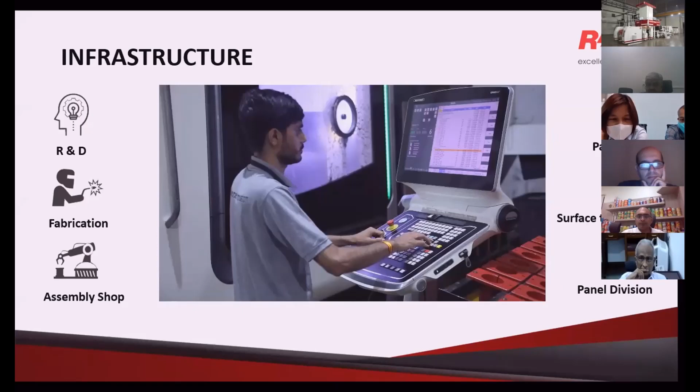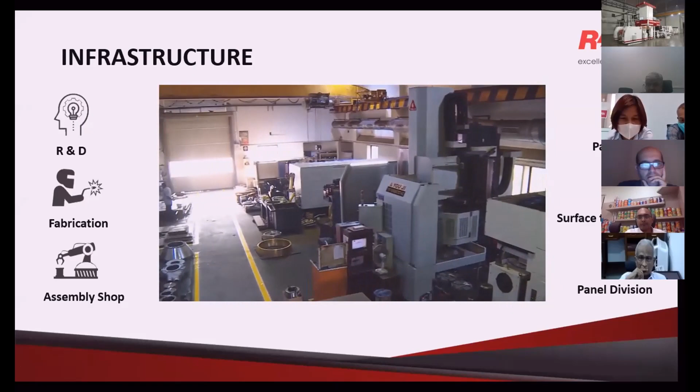As we can see, all the die parts are made on 5 and 7 axis CNC machine centers from DMG Germany with high precision and repeatability for both blown film as well as T-die for ECL and extrusion sheet line. Also, what we're seeing right now is a bird's eye view of part of our machine shop, where even all frames are made on CNC machines to maintain parallelism and precision.

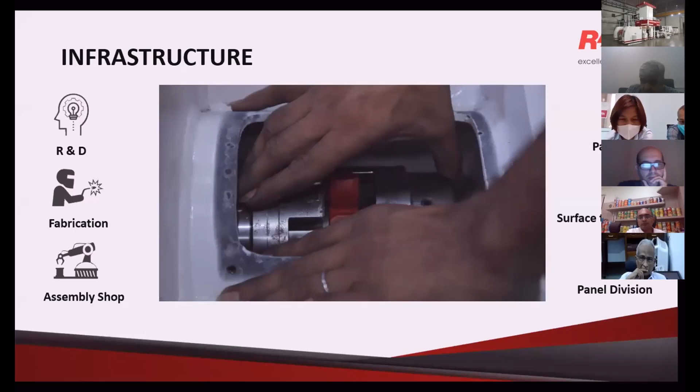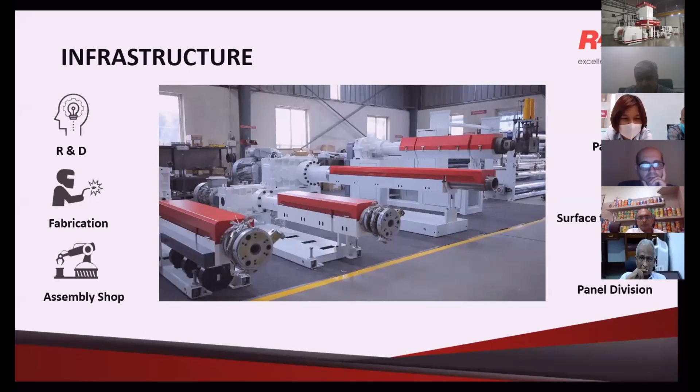At every stage of manufacturing, stringent quality standards are maintained and checked to assure the best performance when all the components and assemblies are put together as a production line.

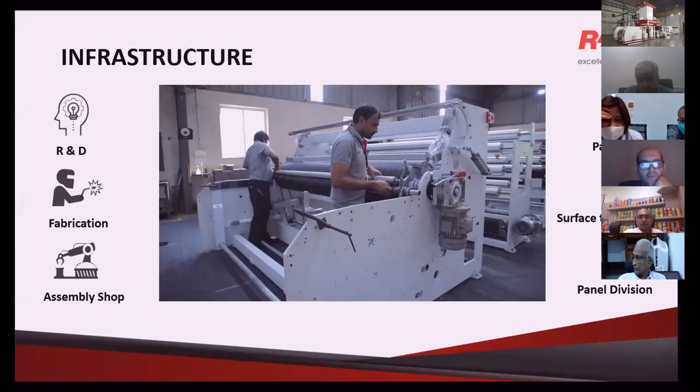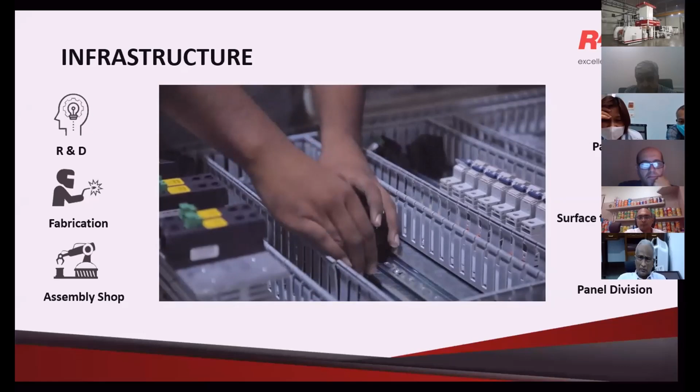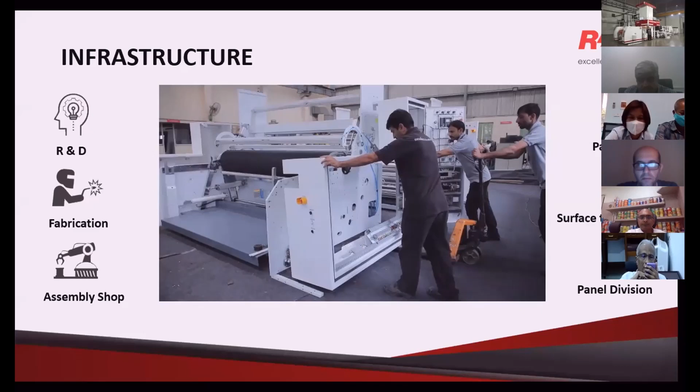As we all know, Industry 4.0 is the need of the hour. So all electronic communication and control panels with CE compliance are built in-house, and with the help of our team of programmers, we make our own operating programs for our machines, and we can integrate different technologies which work seamlessly as one system, enabling us to provide remote customer support, which you will witness later on in this further virtual open house.

With this one, we come to the next point, which is sustainability, a subject which cannot be ignored anymore. Our entire operation runs on solar energy, and all our processes are on SAP, which works with Salesforce, enabling us to get a lean manufacturing setup.

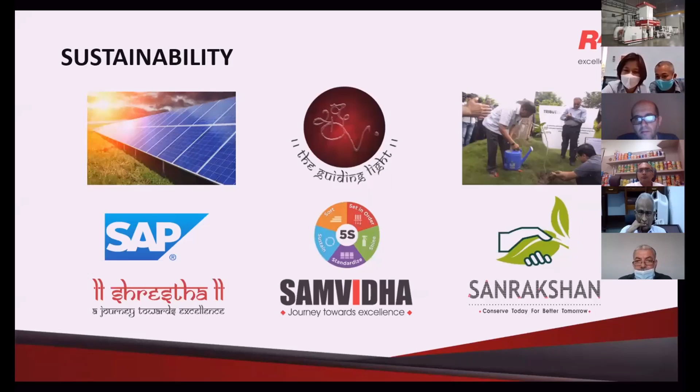This is a very unique offering of Rajoo, called the Rajoo Innovation Centre. With Rajoo Innovation Centre, we have a unique offering where we are equipped with 5 and 7 layer blown film lines, 3 meters wide, to test various formulations and newly designed assemblies, backed up by a full range of laboratory equipment.

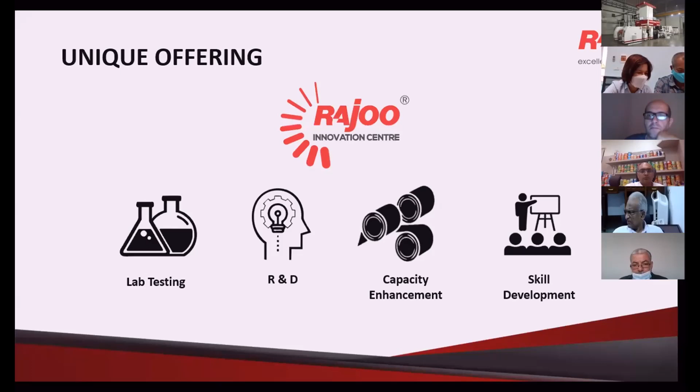With this facility, we are able to take care of our customers at times of machine breakdown, capacity enhancement, and new product development. This center also imparts various training and contributes to skill enhancement for operators and other industry colleagues. RIC also facilitates raw material suppliers like ExxonMobil and Borouge to test their raw material.

With this framework, Rajoo offers blown film lines for barrier and non-barrier film for flexible packaging, agriculture film, and specialty film. We also offer sheet extrusion lines and thermoforming machines for semi-rigid packaging, and cross-lamination film lines with complete post-extrusion systems for tarpaulin applications, and last but not least, extrusion coating and lamination lines for flexible packaging and woven sack industry.

During our journey of 3 decades, we have installed more than 5,000 machines across the globe in more than 70 countries, and also have strategic partnerships and alliances like Wonderpack Industry, which is a pioneer company of thermoforming machines in India, now part of Rajoo Group.

Bausano from Italy, with joint venture company Rajoo Bausano Extrusion Private Limited for PVC extrusion lines. Technical tie-up with MEAF from Holland for sheet extrusion lines. And last but not least, Kohli Industries for extrusion coating and lamination lines.

Like Rajoo, the journey of Kohli Industry began 5 decades ago with the vision of Mr. Kohli to lead the flexible packaging industry with engineering excellence and personalized customer care. Today, Kohli Industry is a leading supplier and preferred choice for printing and converting lines in the flexible packaging industry.

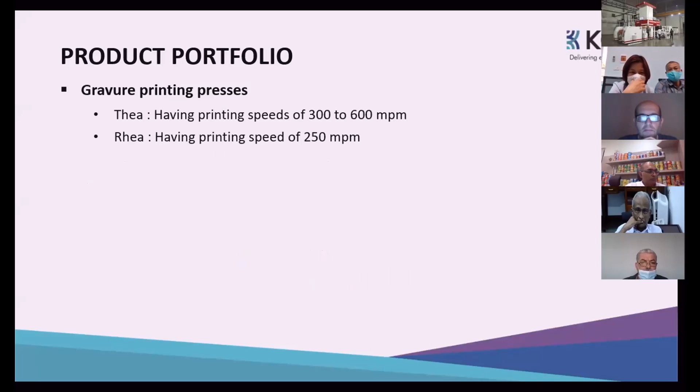With a product range of gravure printing presses of the Thea series with printing speeds of 300 to 600 meters a minute, and a full range of laminating machines with solvent-less, solvent-based, combi and special application lamination lines, and last but not least, slitter rewinders for the flexible packaging and label converting industry.

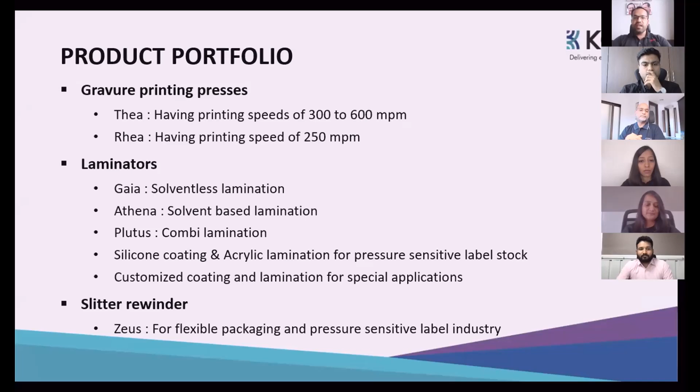The reach of Kohli is also across the globe, with more than 1,600 machines installed in 33 countries. So what we can say is that we have marked our presence in the flexible packaging industry across the globe.

Here, we would also like to introduce Printgraph, our marketing partner for the Lamex series product in India.

So here comes the question: what value proposition are we bringing to the flexible packaging industry for extrusion coating and lamination lines? To answer that, I would like to touch upon a few points.

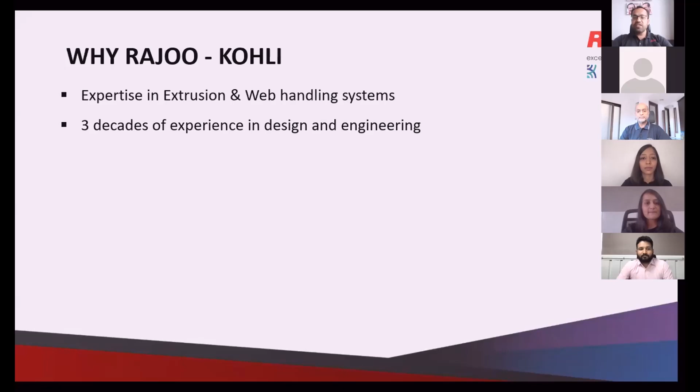First is expertise in both extrusion as well as web handling systems, so we are able to offer the best in class from both sides. We have 3 decades of rich experience in designing and engineering for polymer processing, printing, and converting. We have high precision critical components made in-house like screw, barrel, die head, feed block, as we've seen earlier in our infrastructure. We always focus on making machines with energy efficiency.

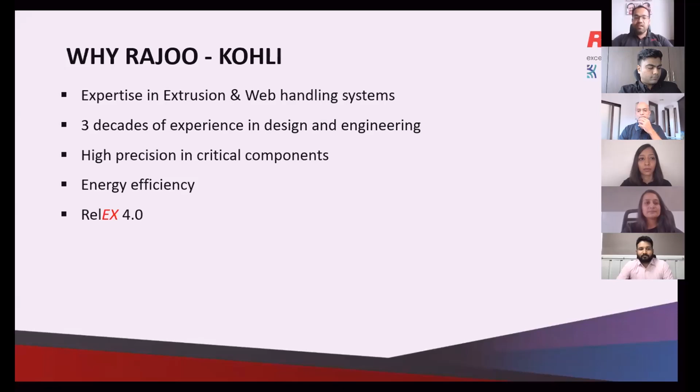As Khushbu mentioned earlier, RelEX 4.0 is a need of the hour when it comes to Industry 4.0. Most importantly, we offer appropriate technology by manufacturing parts, components, and assemblies in-house, as well as integrating the best available in the industry.

Next, we reach the question: why extrusion coating and lamination with reference to other lamination processes? The reasons are many, but we would like to touch upon a few important ones.

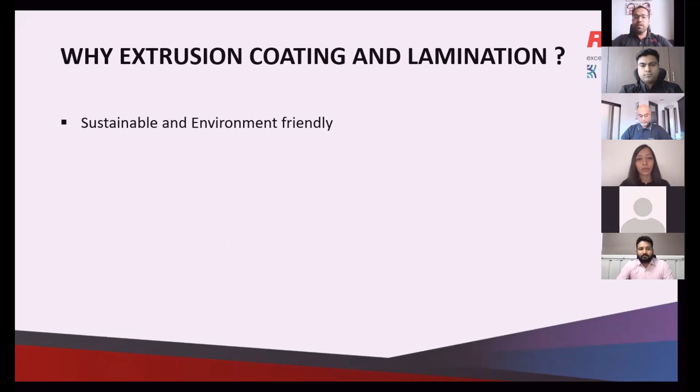First, it's a sustainable and environmentally friendly process, as no chemical is involved in laminating, with virtually zero curing time post lamination, so we can immediately use it for further converting. As polymer melt is used as an adhesive layer, we get better barrier properties, and also cost savings on foil wastage. We also get better flex crack resistance when laminating metallized film. These are the few reasons why extrusion coating and lamination is getting popular compared to many other laminating processes available in the industry.

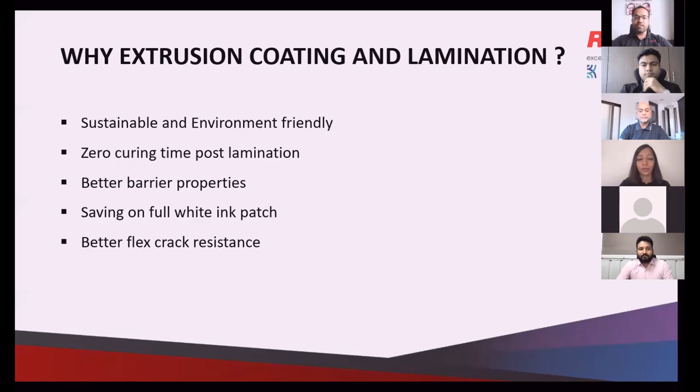Moving forward, though many of you are well aware of the basic concept of extrusion coating and lamination process, let us take a quick look at the concept through this small animated clip.

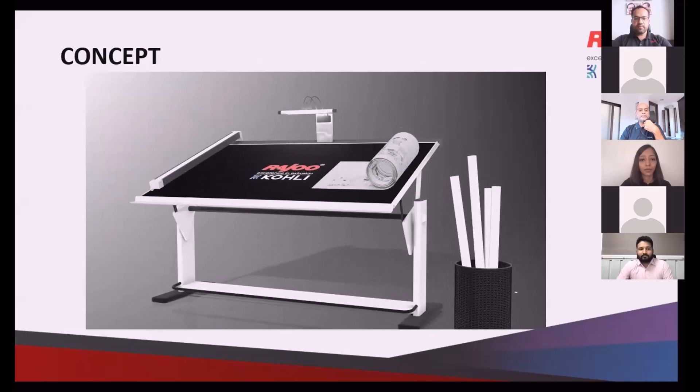Dinesh, there's no sound. No sound. Let me just do it once again.

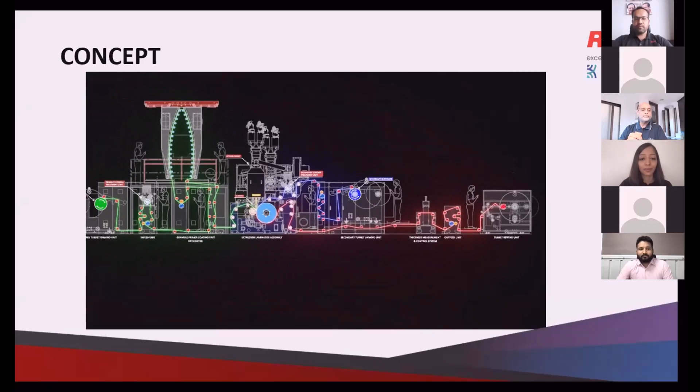I'm sure now all of you are eager to go to the shop floor to see the machine running in commercial production. So I won't take much time, but quickly brief you about the specification of the line and the application we are going to see today. The line is LamEX 360, a coaxial line with a 90 and 75 mm extruder.

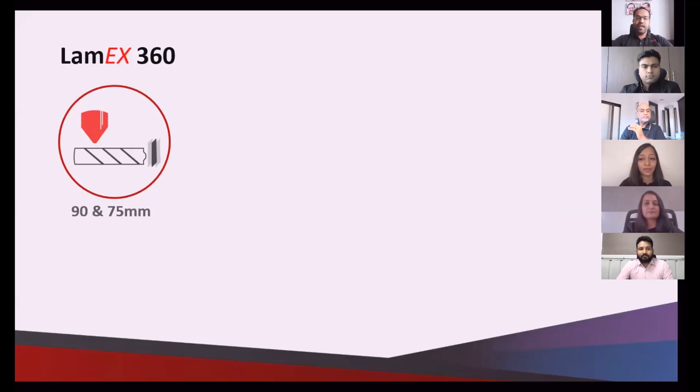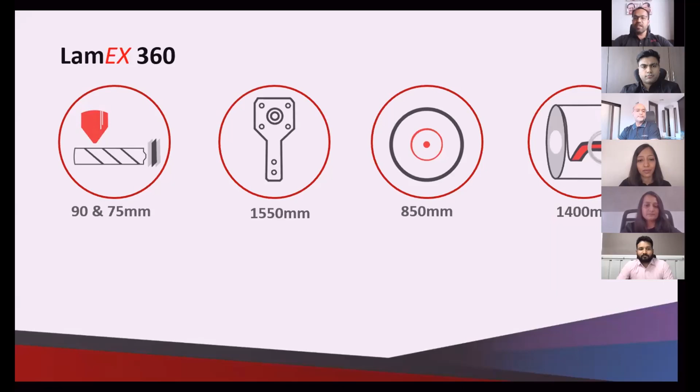It has a die lip width of 1550 mm and a chill roll with 850 mm dia. The maximum web width we can run on this line is 1400 mm, and the machine is mechanically designed for 400 meters per minute, with a production speed of 350 meters per minute, suitable for extrusion coating range from 8 GSM to 60 GSM.

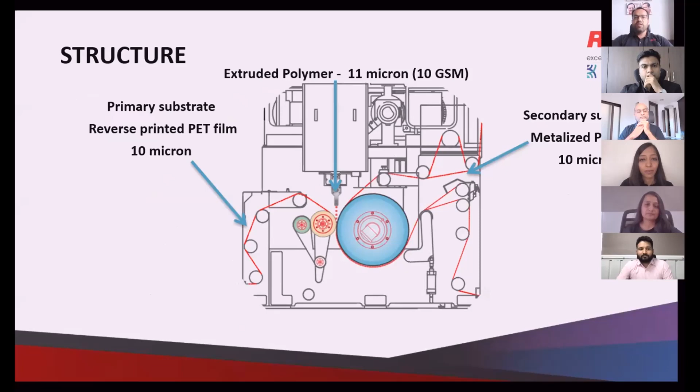The structure we are going to see on this line today is a primary substrate, a reverse printed PET film of 10 micron, laminated with a secondary substrate, which is a metallized PET film of 10 micron, through melt lamination of extruded PE of 11 micron, which is about 10 GSM. The width of the job is 1180 mm and the end application is snacks packaging.

With this, I come to an end of my presentation. Thank you. Over to you, Karishma.

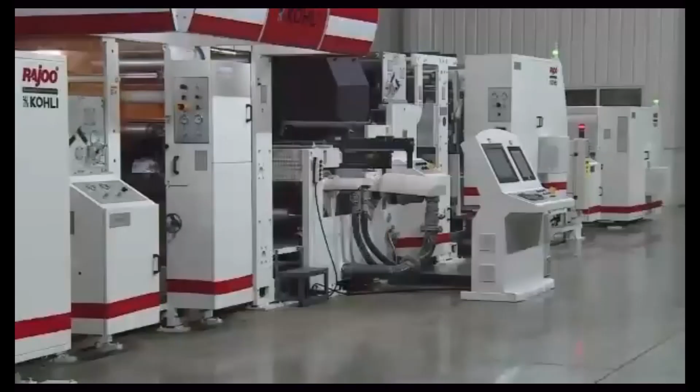Kakuji, sorry to interrupt. Just a minute. So before we ramp up, let's pray to the Almighty. Dharmesh, are you there? Please take the coconut. Yes ma'am, we at Rajoo always believe in spiritual professionalism and pray that wherever our machine goes, it should bring prosperity to the land and the owner of the machine. So I request Dharmesh to do the kick off before ramping up. Dharmesh, where are you? Yeah, there he is. This is our very auspicious ceremony. Thank you, Surya.

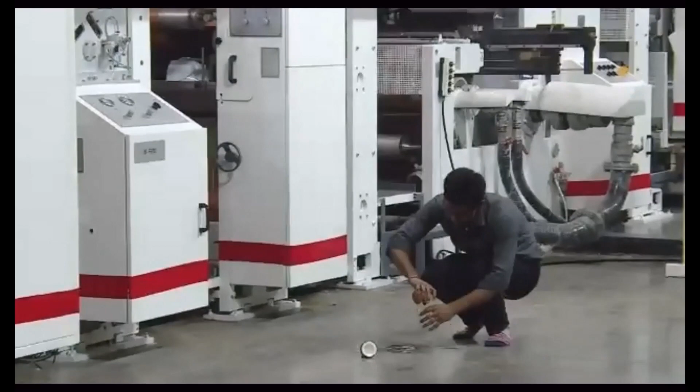Thakurji, over to you. Thanks, Khushbu. Okay, Sonal, okay, there we are.

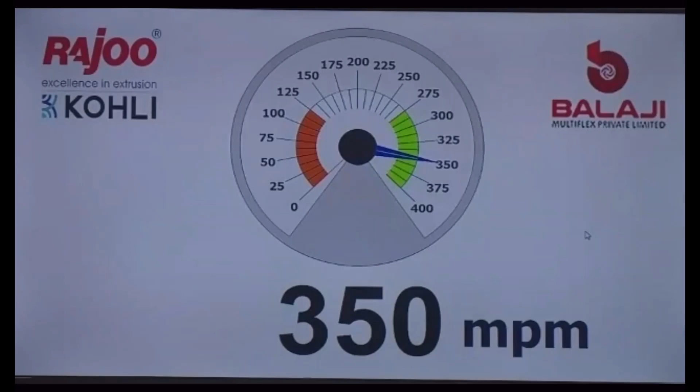The speed is ramping up, and right now we are running the machine at 325 meters per minute, which of course will be ramping up in due course. You can see there, it is going up. It's running at 340 meters per minute now. It has reached, there it is, 350 meters per minute. Wow, as you can see, we have reached a production speed of 351 meters per minute to be exact.

Thank you, everyone. Thanks for that applause. So as you can see, we have reached a production speed of 351 meters per minute. And I am sure this has already increased your expectation for our today's demonstration.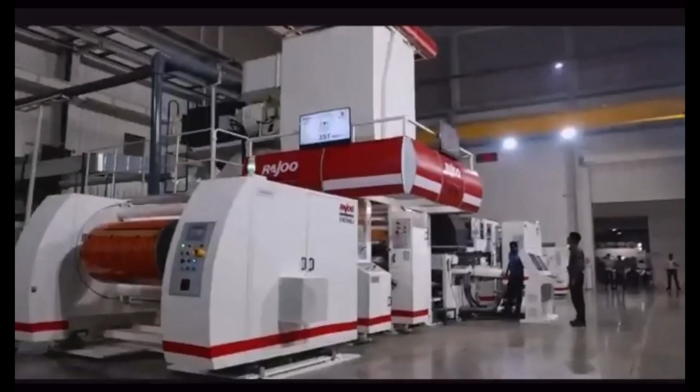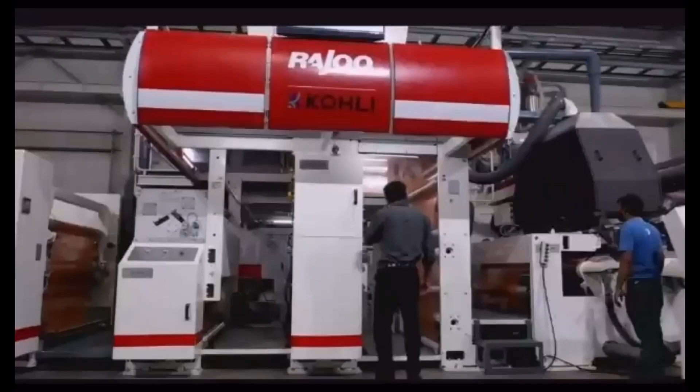We are looking at the machine from the primary unwind side, moving across the entire machine all the way to the rewinder, passing through different processes. What we are crossing is the primary turret unwind, the corona treating and infeed unit, the Gravure anchor coating unit, the control panel behind which we have the extrusion and lamination unit, the corona treating for the secondary web, the secondary turret unwind unit, the coating thickness measuring system, outfeed unit, and finally we reach the rewinder.

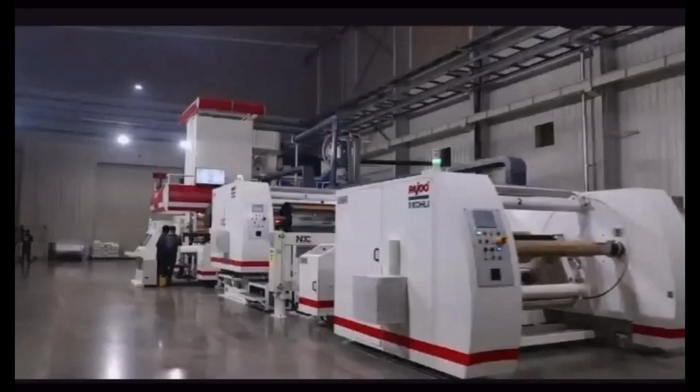Now let us have a closer look at each unit.

Starting from the primary turret unwind unit, the unwinder is designed for reel diameters of 1000 millimeters and reel weights of 1000 kgs. The web tension is precisely controlled by servo motors and dancer rollers. This unit is designed for automatic splicing at maximum production speed, which in this machine is 351 meters per minute. You can do the top side and bottom side splice, depending on the coating side of the substrate. All controls for the unwind tension and the splicing are mounted on the unit itself for easy and safe operation.

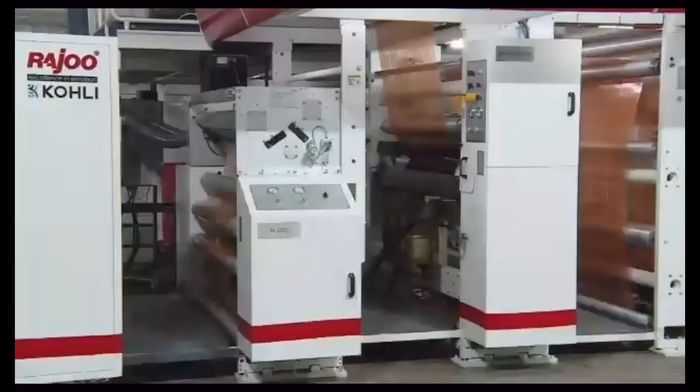Moving ahead to the corona treating unit and the infeed nip assembly. The corona treater in this machine is driven and synchronized with the machine speed. The infeed tension is precisely controlled by a servo motor.

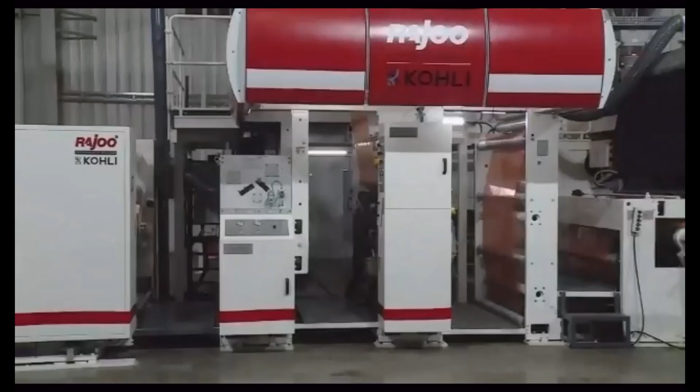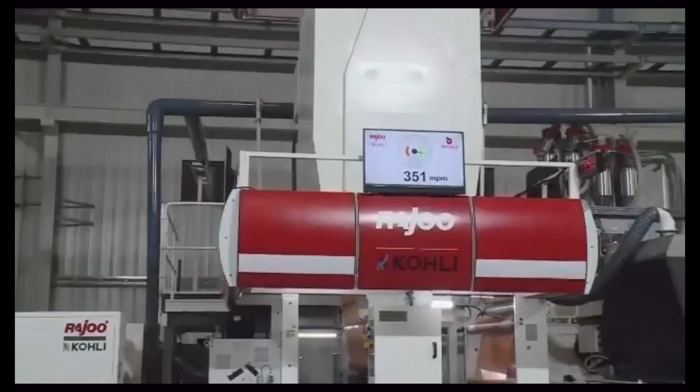Now let us move ahead to the Gravure primer coating station, which is actually very similar to a Gravure coating or Gravure printing station. It consists of the following assemblies: coating roll assembly, rubber pressure roll assembly, doctor blade assembly, lacquer tray assembly, lacquer circulation system, and drying. The drying system consists of two-side drying, also known as double-side drying hood, having a total drying length of 6 meters, or 3 meters on each side.

Both drying hoods slide open pneumatically above the catwalk, which allows the machine operators to walk right inside the drying area for easy cleaning and maintenance of idler rollers and air nozzles. As you can see, the machine is already in production and running at 351 meters per minute.

Unfortunately, we will not be able to show you this feature live, but we did record this operation earlier, and I will request Pratik to please share his screen and we will show you this recording.

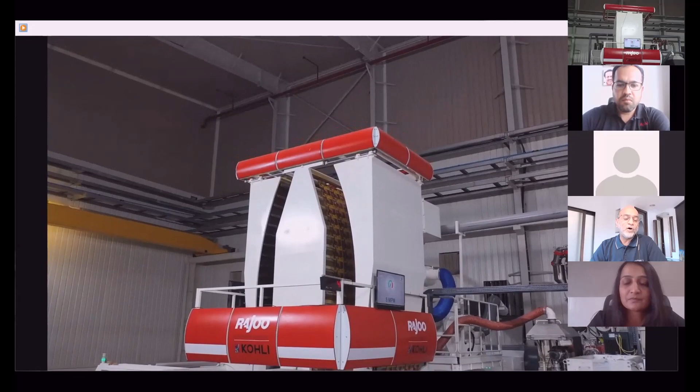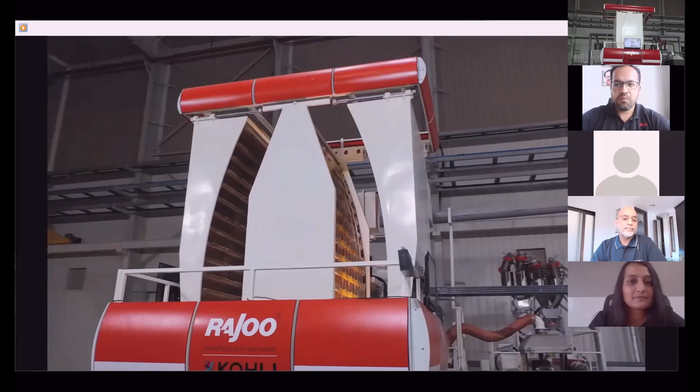As you can see, that's the double-side drying hood. It is opening pneumatically above the catwalk, allowing machine operators to go right inside the drying hood area for easy cleaning of rollers and maintenance of air nozzles. That's our two-side drying, having a total length of 6 meters. And now you will see it closing, again sliding pneumatically above the catwalk.

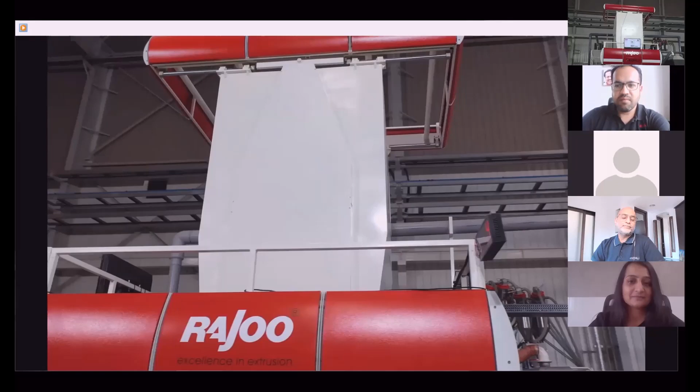Thank you, Pratik. The drying hoods are designed to ensure maximum efficiency with minimum energy consumption. We offer different heating options: electrical, thermic oil, and gas.

Now let us go over to the secondary turret unwind unit. This unwinder also is designed for reel diameters of 1000 millimeters and reel weights of 1000 kilograms. The web tension again is very precisely controlled by servo motors and dancer rollers. Again, automatic splicing is done at maximum machine production speed, 351 meters, as we have all seen. Just like the primary unwinder, here also you can do top or bottom splice, depending on the laminating side of the structure. All controls for the unwind tension and splice are mounted on the unit itself for easy and safe operation.

Following the production process flow, at this time, ladies and gentlemen, I would like to bring in Sunil from Rajoo, who will take you through the extrusion and lamination process of the machine. Sunil, over to you. Thank you very much, Kapu.

Witnessing the extrusion coating and laminating line in an open house, and that too at a customer's production facility, would surely have raised a lot of expectations from us. We will try our best to delight our viewers today. I must commend the Rajoo Kolsite team, and also thanks once again to ever so energetic and passionate Pranav Bhai of Palaji for his support. While Kolsite's forte is converting and web handling, extrusion is in the very DNA of Rajoo engineers. Not many may know, within the Rajoo group, we also process about 1,000 tons of polymers every month. So Rajoo are machine manufacturers and polymer processors as well, a very strong combination.

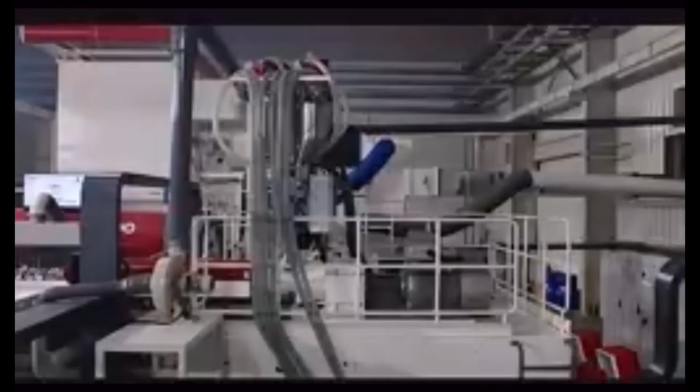This machine is a co-ex system with two extruders mounted on a platform with 3-axis movement, X, Y, and Z. Two axis is not sufficient at times since flexibility is needed by the operators.

Each extruder is equipped with a multi-component material conveying system. You can see the pipes conveying the granules from the floor to the top of the extruder through vacuum.

Prices of polymers have gone through the roof, and so have the prices of copolymers, master batches, and additives. Accurate dosing of each polymer component is essential. Dosing and blending thus plays an important role.

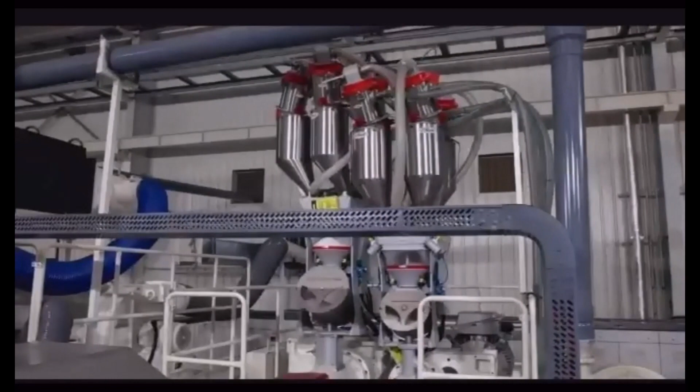You are now able to see, very soon you will be seeing the rotary motion in the batch blenders mounted on each extruder. Right below the extruder you can see a tumbler. This also helps in maintaining consistency in the polymer recipes.

Brand owners today are demanding supply of laminates measured in meters and not in kgs as it used to be. This is necessary for them to control their own cost of packaging. This number of packs per roll of laminate is important. Then control of yield, or grams per square meter of the laminate, becomes even more important.

The machine is equipped with a GSM control system. This is achieved by controlling the screw speed, nip speed, and weight of the polymer being fed to the extruder, measured by the load cells just before the granules enter the extruder.

Energy efficiency is a hallmark of Rajoo's extrusion system. When extruders are operating, the heaters hardly come on. Heat is generated through friction to keep the polymer in molten state.

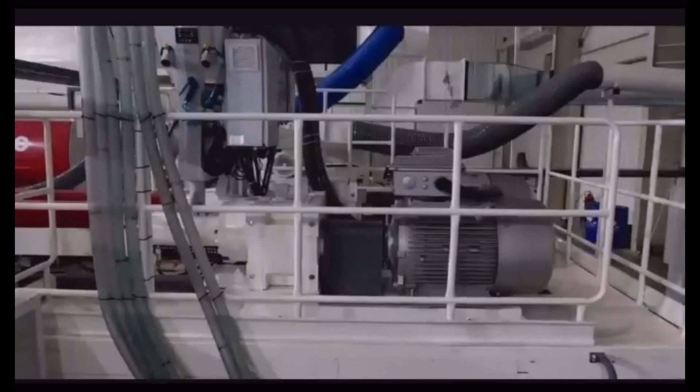As an example of energy efficiency, extruders are connected to the gearbox, which in turn is connected to the motor through flexible coupling. Gone are the days of the V-belt and pulley system, thus reducing transmission losses.

Operator safety is always kept in mind in the complete design of the machine, since there are many moving parts and hot zones. There are emergency switches in a number of places, and also rope switches. The moving parts are covered, and hot parts are prominently identified. All such aspects, and even the ergonomics, are always kept in mind, like you see the drying hoods opening up.

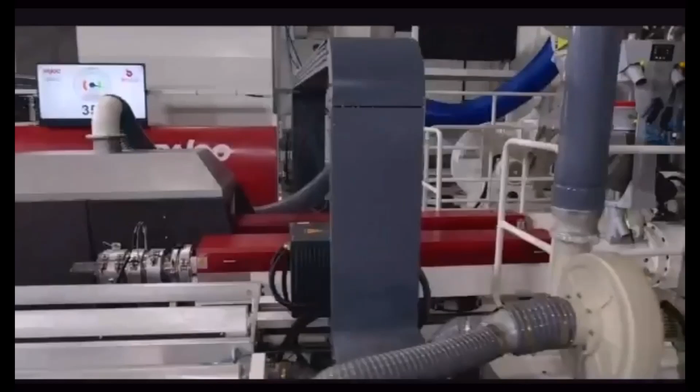Rajoo makes their own screw and barrel for all applications, sheet lines, blown film lines, and extrusion coating and laminating. You did have a view of our manufacturing facilities. However, we continue to develop screws and barrels based on the rheology of the polymers being developed each day, and this does become important when processing critical polymers.

This machine is with two extruders, the two red hoods you see on your screen. It helps in processing different polymers in each layer. The extruders are 90 mm and 75 mm in size.

A co-extrusion system helps in reducing the cost of recipe, expensive polymers which are used in just one of the layers. For this particular application, in addition to the double barrier section and the detachable mixing pin, we also provide a static mixer between the extruder and die to further homogenize the melt and improve its quality.

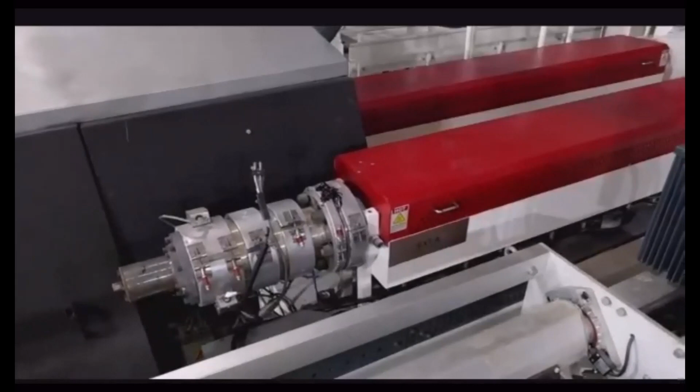The polymers do come with a lot of impurities, and it is absolutely essential to remove them to improve melt quality and its properties. The extruders are equipped with a candle filter, which you see right in front of the extruder, which has a very high melt filtration area. The melt pressure and temperature is continuously monitored, and there are alarms in case the back pressure crosses its limits due to clogging of the screen or any other malfunction.

Since there are two extruders, it is necessary to combine the two layers, which is achieved by the feed block. The melt path in the feed block is critical, and the surfaces coming in contact with the hot melt are properly machined with no dead spots, to ensure consistency and maintain the desired layer thickness ratio.

This is a 3-layer BBA layout. The BB streams are coming from the 90 mm extruder, and the A stream from the 75 mm extruder.

When we come to the control center, the GSM being deposited by each extruder will also be visible. And now the die, the heart of the machine.

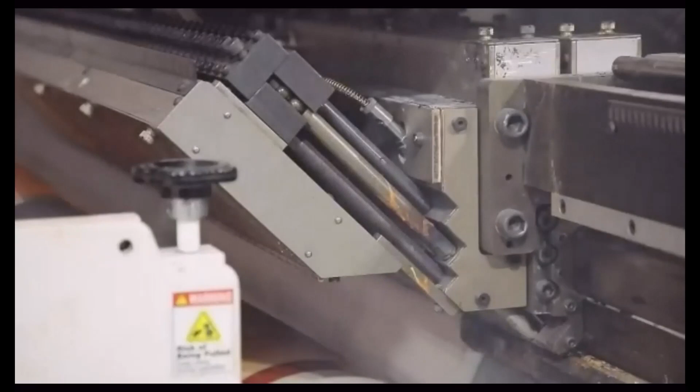Rajoo has been designing and manufacturing T-dies for over 26 years for our sheet extrusion systems. Thus, developing T-dies for ECL came to us naturally. I can say with pride that Rajoo is the only Asian ECL supplier to offer our own manual dies.

Die design is critical. The melt flow paths are without any dead spots, and the melt flow is streamlined for ensuring consistent deposit of the polymer. The surfaces coming in contact with the molten polymer are finely polished with minimum friction in the melt flow path. When it comes to automatic dies, we source from the best in the world.

The automatic die on the 360 is from Cloeren in the US, with minimum edge bead using EBR technology. Effective deckling is up to 50% of the slot width, which is 1550 mm.

The 1550 die gap is adjusted using 62 bolts with cartridge heaters, which expand or contract depending on the signals being received from the thickness measurement sensor, which we will see shortly. This is another example of Rajoo offering customized, appropriate technology and integrating bought-out systems in the machine.

The laminating station is another critical assembly in this process, where the primary substrate is laminated with the secondary substrate using molten polymer under nip pressure.

The chill roll, the big roll on the right-hand side around which the laminate is wrapped, cools the molten polymer very rapidly. Thus, this roll is highly heat conductive with very low thermal expansion. It is a double shell design with spiral flutes, with water circulating through it for minimum temperature variation across the width. This is an important factor to ensure a high and consistent bond strength.

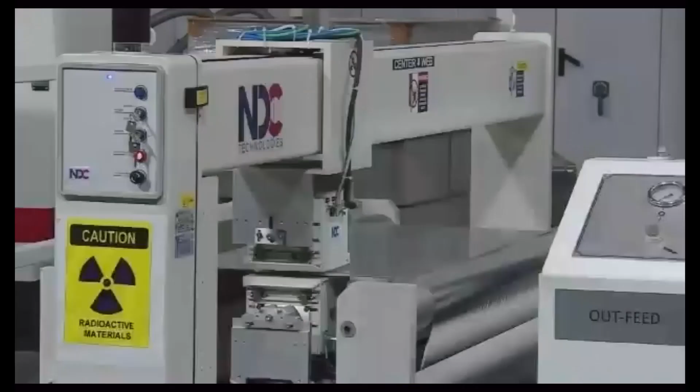The total thickness of the laminate is measured by the beta nuclear transmission sensor. The web passes through the scanner, oscillating across the complete width. The thickness is sensed, processed by the software, and gives continuous feedback to the die for adjustment of the die lip gap. This system is sourced from NDC in the US.

Yet another example of successful integration by Rajoo of a bought-out system with the main equipment. A question is often asked: why both GSM control and automatic die? While the GSM control improves the thickness variation in the machine direction lengthwise, the automatic die controls the cross direction, that is along the width, and the deposit of the molten polymer between the two substrates.

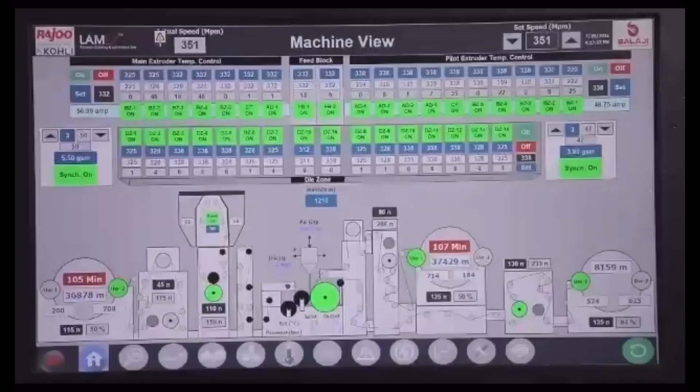This is the nerve center, or the control center, for the full machine. From a single touch screen, all the machine functions are monitored and controlled. It incorporates the RELEX 4.0 platform of Rajoo engineers. It is also being monitored and controlled remotely through a smartphone or a tablet.

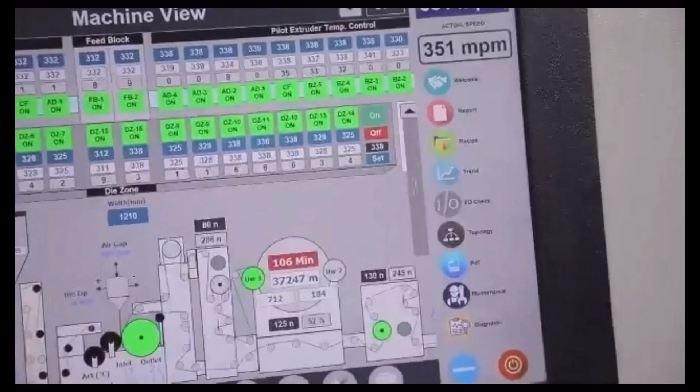This platform has multiple features. All kinds of reports can be generated: shift production reports, thickness variation, material consumption. Recipe of the polymers is entered and can also be recalled at a later stage. Even the data of different polymers can be stored. Trends like temperature profiles and electrical loads are available.

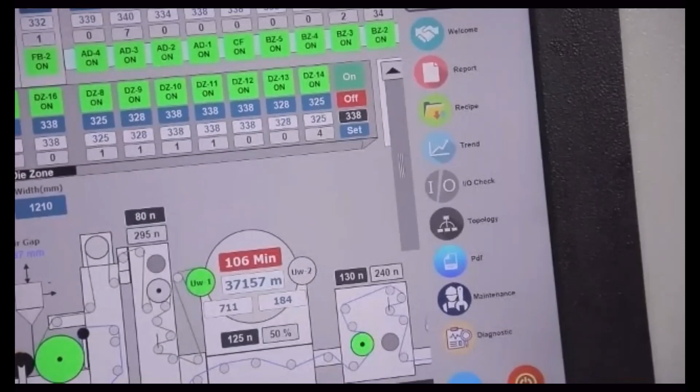The topology of how all components are interconnected to each other can also be seen. With the maintenance menu, diagnostics for the complete machine are available to help in fault detection. Gone are the days of looking for hard copies of the operating manuals, and when you want them, you never find them. The system comes preloaded with manuals of each and every function and assembly of the machine. Even ordering of spares is so easy, since all the information is available digitally.

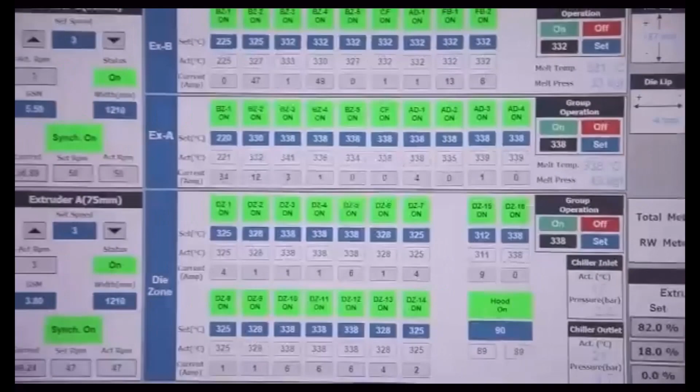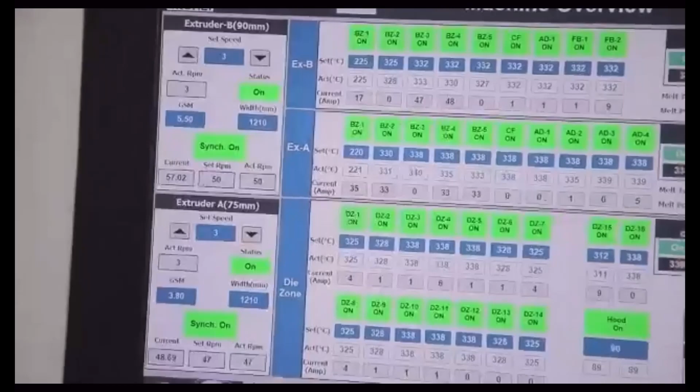The machine is currently running at, if I can see the screen, it was running at, oh, it's still running at 351 meters per minute. One can see the left panel where it shows the deposit by the extruders. The top one is a 90 mm extruder running at an RPM of 50. The bottom is a 75 mm extruder running at 47 RPM and depositing 3.8 GSM. So close to 9 GSM is being deposited.

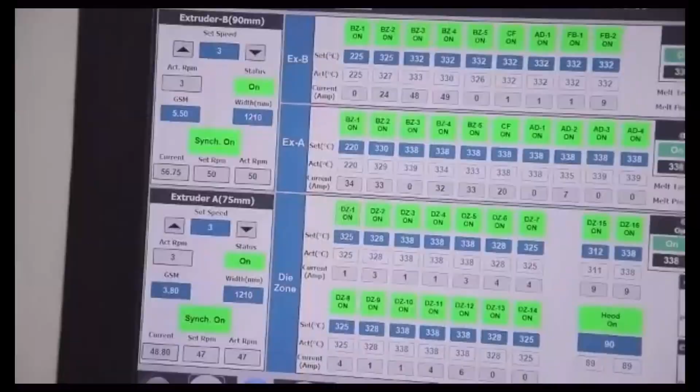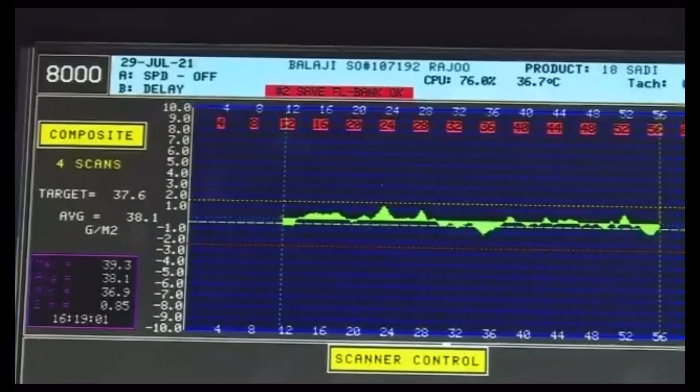Moving forward on web handling, can I request Kaku to come in, please?

Thank you, Sunil. Now let's go over to the turret rewind unit. The rewinder is again designed for reel diameters of 1000 millimeter and reel weights of 1000 kilograms. The web tension is precisely controlled by servo motors and dancer roll assemblies. Splicing is always at the maximum production speed, which in this machine is 351 meters per minute. At the rewind unit also, you can do top or bottom splice, depending on which side of the laminated web you want as the outside surface of your reel.

As the machine is ready to embrace Industry 4.0, it is easy to operate all machine parameters from a mobile smart screen. It could be a phone, could be a tablet.

I will have to just check, because this is actually live production, actual production. So we will be showing you the splice. Let me check with the team when they are ready for the splice so we can come back to that. Can anyone check and let me know, please, when the splice will take place? So we can go ahead and come back here.

Yes, sir, we are ready. Oh, you're ready? Okay, fine. So let us have a look at the splice taking place at 351 meters per minute.

What you're seeing is the old roll, or the current roll, rewound, which is inside. The new core was mounted outside, which is now rotating and going inside.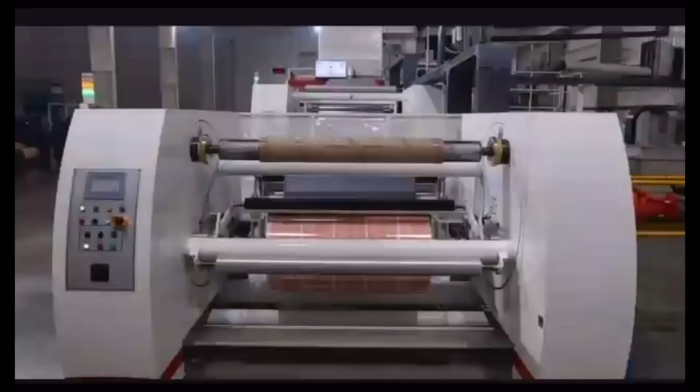Don't worry, I can explain. There it is, you can see the splice taking place. Now the running roll is coming outside and the core is inside, which will start rotating at the machine speed very soon once it stops rotating. There, now it will start rotating. It will reach the machine speed, which is 351 meters per minute. A machine operator will come and, with the press of a button, it will splice.

Yes, the bump roll has come in, it has spliced. That was the rewind splice we just saw at 350 meters per minute. So ladies and gentlemen, what we have just seen here is LAMEX, a result of an unbeatable combination of technology and engineering from Rajoo, the leaders in extrusion, and Kohli, the leaders in web handling.

Let us take another quick look at LAMEX before we move on to the next session. This time, we will move from the rewinder and go all the way back to the primary unwinder where we started. That's the rewind splice we all just saw. Now I will take you on the tour backwards, going from the rewind to the unwinder.

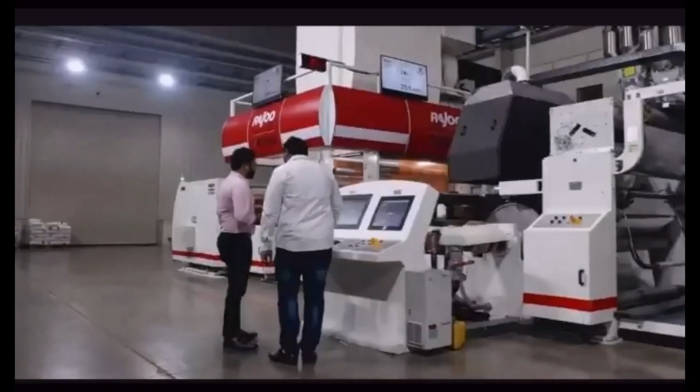And wow, that's a good surprise. Here we see Pratik ji and Pranav ji also taking a tour with us, walking along the machine with us, going towards the unwinder. There they are, on the left is Pranav ji, on the right is Pratik ji. And okay, they are stopping at the control panel. What are they up to?

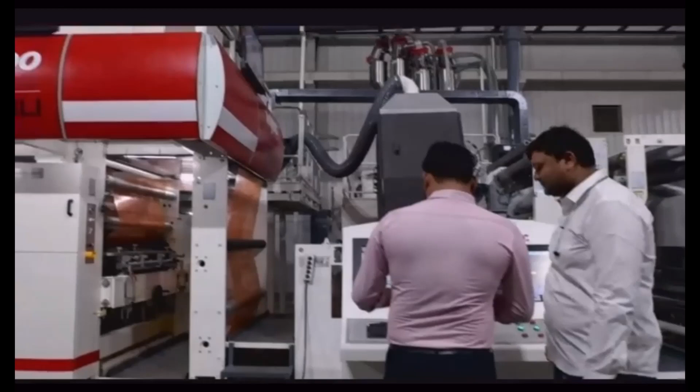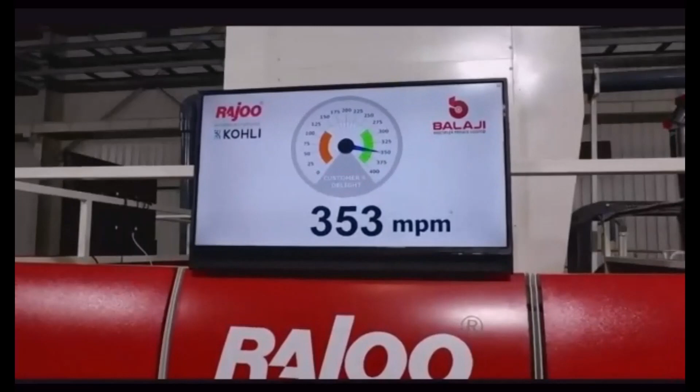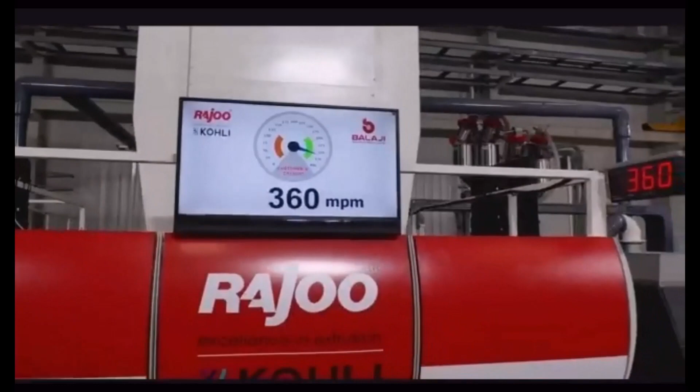Pratik ji, Pranav ji has a tablet in his hand, let us see what he's trying to do. Don't further increase the speed. They are pointing it to us, pointing somewhere to us. They're pointing it here and it is 351. What are they doing? I don't know. What are they showing? They're showing us 351 meters, it's a customer's delight, it actually is a customer's delight. Oh yes, there I got it, it's 352 I think. I think Pranav ji is not satisfied with 350. Oh my God, he has taken the speed further to 360 meters per minute. Wow, oh, wow. That wasn't expected. Thank you.

Now let's continue with our tour. And ladies and gentlemen, we reach back where we started the journey when we started the demonstration, the primary turret unwinder, where it all started.

Thanks. So this is LAMEX, extrusion coating and lamination at its best.